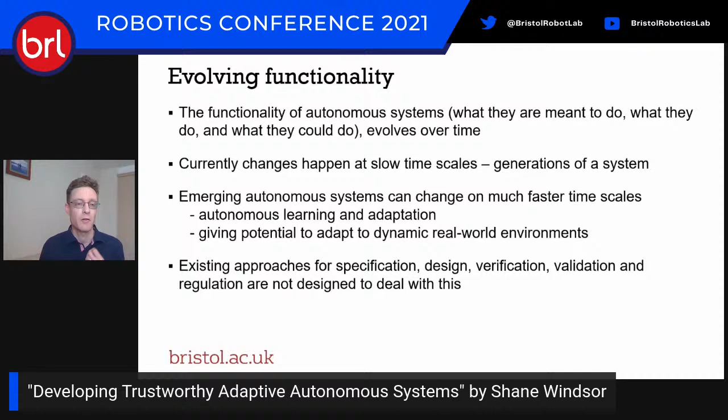Because all of our existing methods generally make the assumption that as soon as the system leaves the manufacturer or the factory and goes out into operation, it's not changing in terms of its fundamental functionality and the way it works. However, if we give the systems the ability to adapt and evolve to make them more suited to complex real-world environments, do we need to change the processes that we're using around these systems in light of this ability to adapt and evolve?

So the objectives for the node are to investigate this question of how, when we give an autonomous system the ability to adapt, what processes we need to use, or how suitable our current processes are for dealing with this.

And the goal is to develop a trustworthiness framework, where we look at the aspects of specification, trust, verification and validation, and regulation together in a holistic way, focusing on adaptive autonomous systems, and create best practice guidance when considering these types of systems.

So how are we going to go about this? Well, the node has 7 work packages, and we're focusing on 3 different types of technology, all of which have fundamentally different ways in which they adapt. We're looking at swarm robotics, soft robotics, and unmanned air vehicles as the technologies where we're developing adaptive abilities.

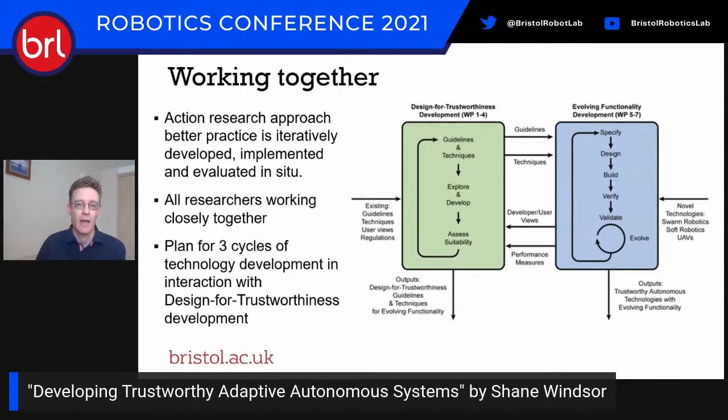So the idea is to have everyone physically based in the Bristol Robotics Lab working closely together on these aspects, and bring in our project partners into this design process and evaluation process as we go through.

So the first adaptive technology we're looking at is swarm robotics, and this is the work of Sabine Hauert.

The particular use case we're looking at is the idea of a pop-up cloakroom. So the idea is there are lots of robots that work independently in a swarm, which can be put into an unstructured environment and operate a cloakroom. You come up to one of these robots at a particular location, give it your jacket, and then it will go away and deposit it and store it.

And the idea with the swarms is that you can do this without needing dedicated infrastructure. It can be low cost, it can be flexible.

What we're really interested in looking at in this design, in this particular use case, is how to design this system in such a way that we consider the aspects of its performance as well as its trustworthiness, its ability to be verified, its ability to be regulated right from the beginning.

And in particular, looking at how, if we change the number of robots or the complexity of the individual robots, this influences this ability. And I should say, for these robots, the adaptive aspect actually comes through the emergent behavior and the interaction of the individual robots in the swarm. So we don't necessarily need the individual robot to adapt, but because of the interaction between an individual robot with its environment and with the other robots, you get adaptive behaviors occurring.

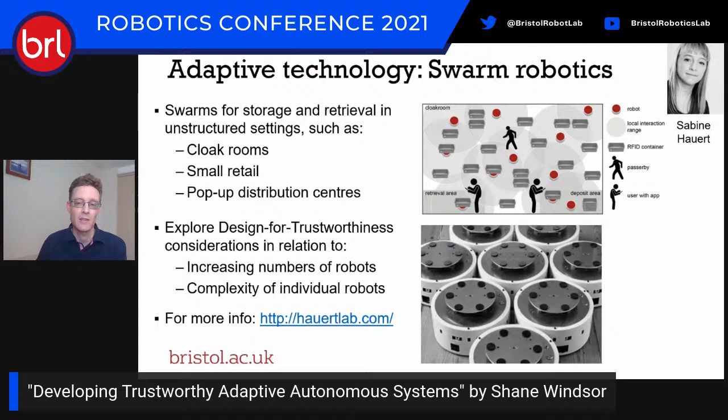Second adaptive technology we're looking at is soft robotics. And this is the work of Jonathan Rossiter. Now, for those who aren't familiar, soft robotics is the idea that you can make robots out of soft, compliant materials, not just rigid plastics and metals, but actually you can use smart materials with embedded actuators and sensors and power sources in clever, novel ways.

And the adaptation in this type of system can come through the material properties of the materials that you actually use to build the robot. So this is a fundamentally different way of adapting, and it's based on the structure and materials used in the robot and the way they're all coupled together.

And in this particular project, we're going to be looking at the development of standards for trustworthy soft robotics. This is a very new and low TRL level exercise on the whole with most soft robots. So there's a real need for thinking about the next step as these advance in technology readiness level for what sort of standards might need to be applicable to these. What might they look like? How would you go about designing it when you've got such varied types of mechanics and materials involved?

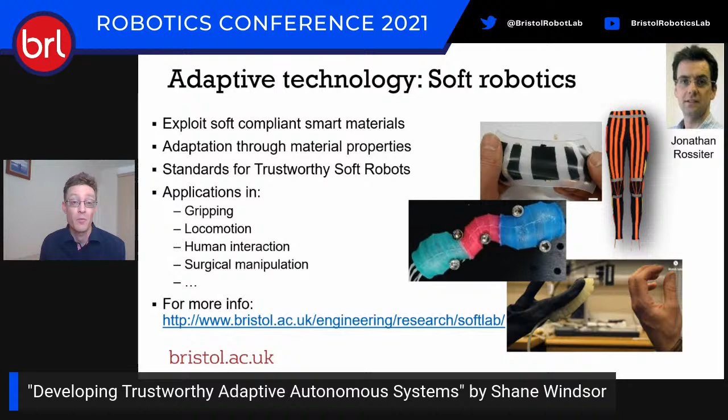And so Jonathan's design will be leading the development of a number of different soft robotics for applications such as gripping, locomotion, surgical manipulation. And if you'd like to find out more, there's lots of information there on his website.

The third adaptive technology we're looking at is unmanned air vehicles. And here the adaptation is actually happening through machine learning algorithms, which are being embedded or being made part of the flight control system for the unmanned air vehicles.

And this is part of the work package that I'll be leading. So here we're looking at the application of machine learning for flight control. And the particular case studies we're looking at is the use of multi-rotors in urban environments, and we're going to be testing this out with scaled down quadcopters flying around in the Bristol Robotics flight arena, and also looking at morphing wing unmanned air vehicles, which we're developing which have distributed sensors in the wings of the vehicles.

And this is inspired by what we see in birds and insects, where they have lots of sensors distributed all across their wing, which pick up on airflow information and forces acting on the wing. And here we're looking at how we might incorporate different machine learning aspects into the flight control system.

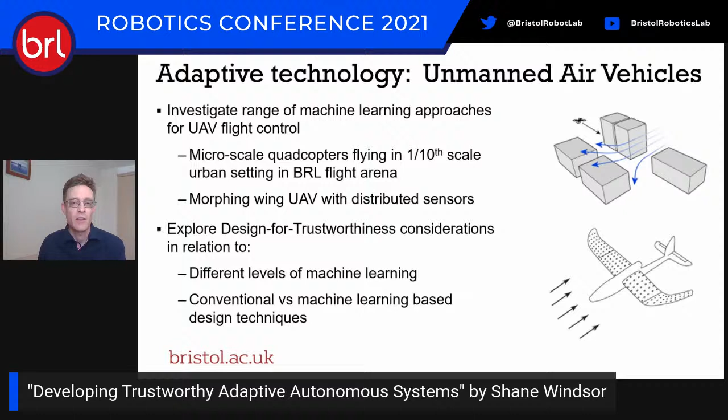From hybrid systems, where just small components of the flight control are based on machine learning, to fully machine learn-based control systems, where we are developing potentially reinforcement learning-based controllers or end-to-end controllers, where we have the complete spectrum from hybrid systems, which are mostly conventional, all the way through to fully machine learned control systems.

And here we're looking at how, when we start bringing machine learning into these type of systems, how this influences the design process, and then the verification, regulation, and ethical aspects that arise from this.

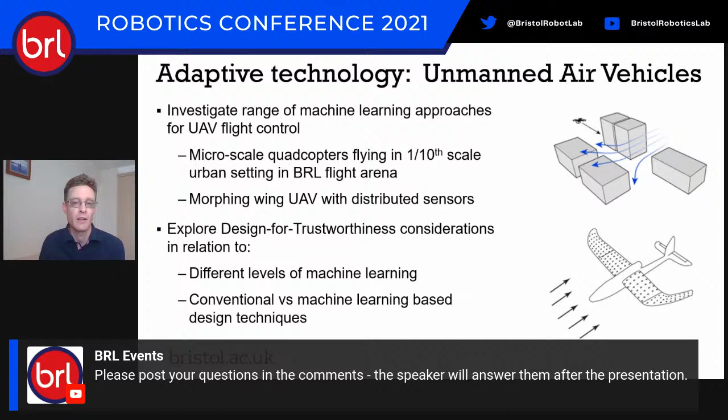So I've talked about the technologies, and the next aspect I want to talk about is that these technologies are being used as use cases and study examples for actually what do we need to do around these type of adaptive systems to make them usable in the real world, in terms of all the other aspects that are needed for a system, such as specification.

So if you've got an adaptive system, how do you specify it? How do you inherently want to give it the scope to move beyond the kind of conditions that it's made for as it's in the factory? But how do you specify the limits on that system? And how do other aspects, such as regulatory considerations, verification considerations, change the way you might specify the system?

Next aspect we're looking at, led by Jonathan Ives, is the idea of trust for an adaptive system. What does it take for a technology to be trustworthy? Why do people trust particular technologies? And what can developers do to facilitate trust, to illustrate trustworthiness?

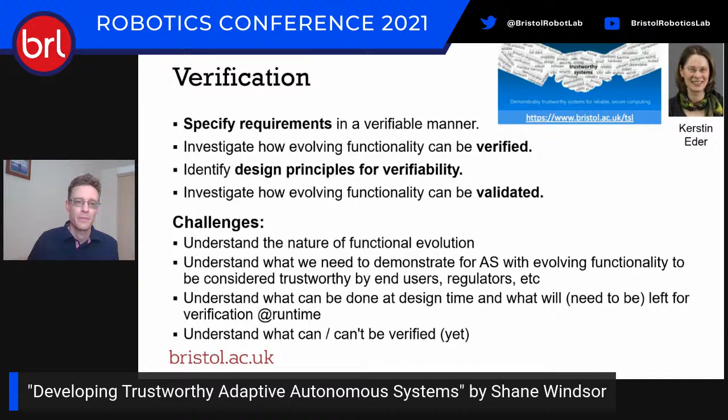As I said, this project is currently underway. We're running for another three years, and we're really interested in talking to people, parties or companies interested in this question of, when you have an autonomous system with adaptive abilities, how does that change how we consider these systems? How does it change the way we trust them, design them, regulate them, and verify them? What is it that we can take from our current ways of doing things and apply to adaptive systems? And what aspects do we need to change in our processes to account for and make them better suited for adaptive systems, allowing us to unlock the potential of adaptive and learning-based systems in the real world?

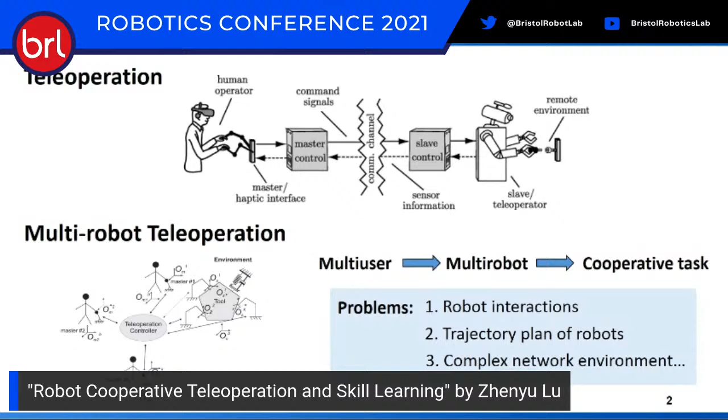Here we mainly consider the case with two robots to complete a human-like cooperative action. Inspired by human beings, the two hands are divided into the dominant hand and the non-dominant hand. The dominant hand is used for positioning and leading actions, and the non-dominant one is to assist the dominant. So we divide the two robots into the dominant robot and the non-dominant robot. The dominant robot is to track human hand motions, and the non-dominant one will react like the non-dominant hand to help the dominant robot.

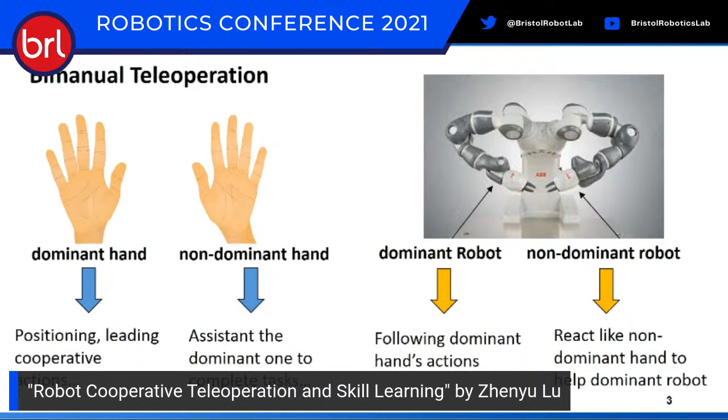A controller for the robot and the manipulator in the master side are designed differently. First, for the dominant robot, we designed a position tracking controller with a robust term.

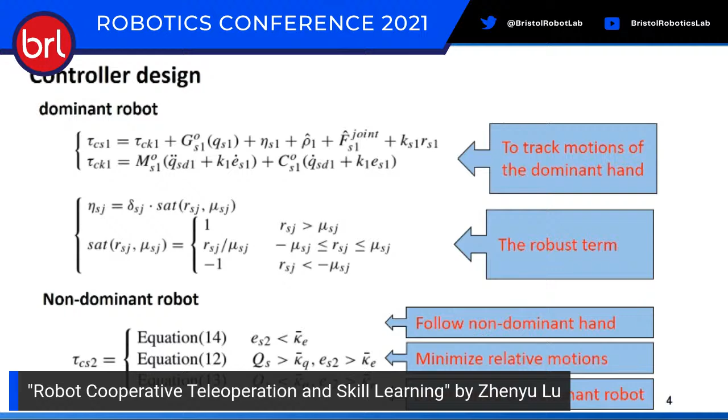For the non-dominant robot, the controller is designed to realize different purposes for different conditions. If the relative distance to the dominant robot is too large, the non-dominant one will first minimize the relative motions and then follow the corresponding leading hand. Here are the exact expressions of the different controllers for switching, for the non-dominant robot.

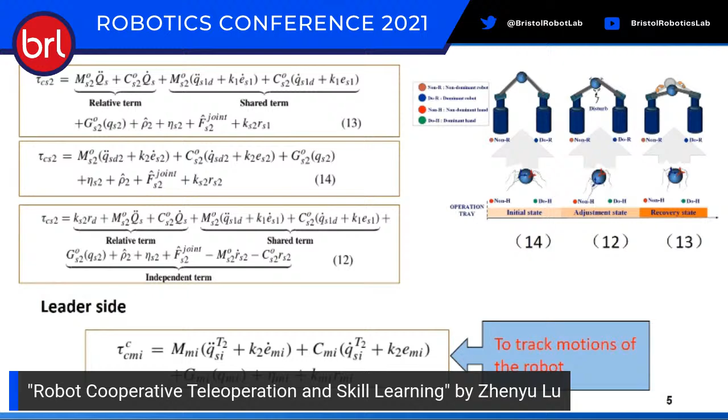And in the leader side, the controller is designed to track the motions of the robot by using PD control. After building the model of the object contact force, we complete the experiment of picking and placing a ball by teleoperation.

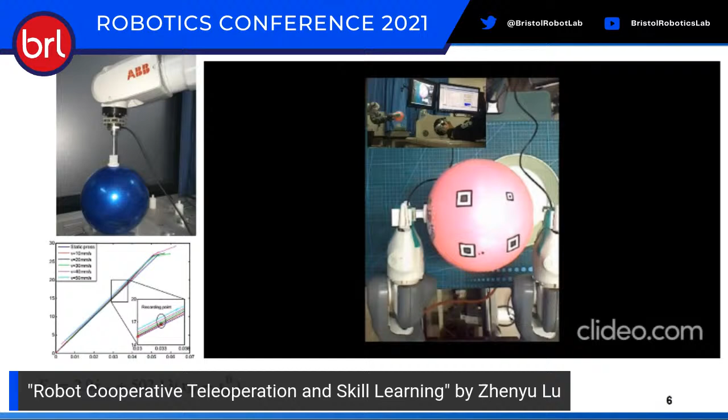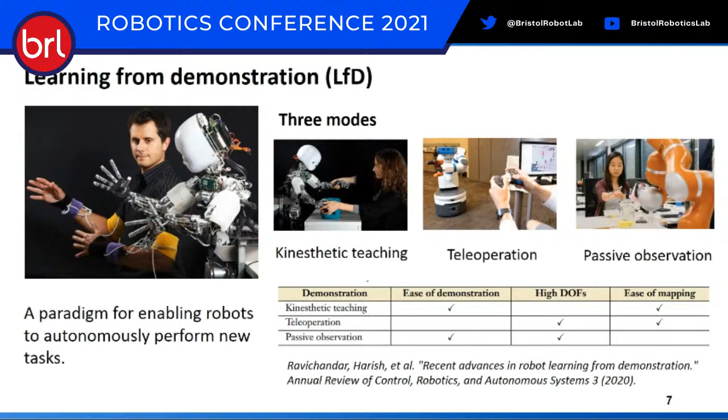Teleoperation is also a way for learning from demonstration technology, which is a paradigm for enabling robots to autonomously perform new tasks. But sometimes the demonstrations face challenges such as occlusion, rapid object movements, and some mirroring sensor noise, which makes the learning results fail.

What we thought is to add some special constraints to the skill learning process. DMP is a common way to do skill learning, and its expression is very simple. It just has one damping and one stiffness factor and a force nonlinear function Fs.

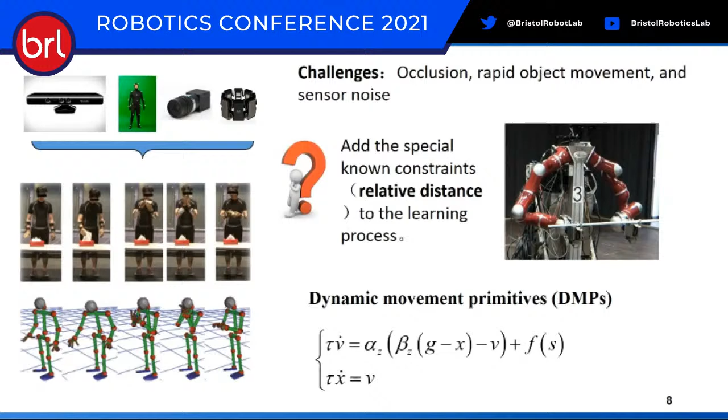After segmenting the demonstrations into primitive skills and making alignments for the segments, the skill will be learned and generalized to new cases by changing the starts, ends, and scaling factors, and applied to the new tasks.

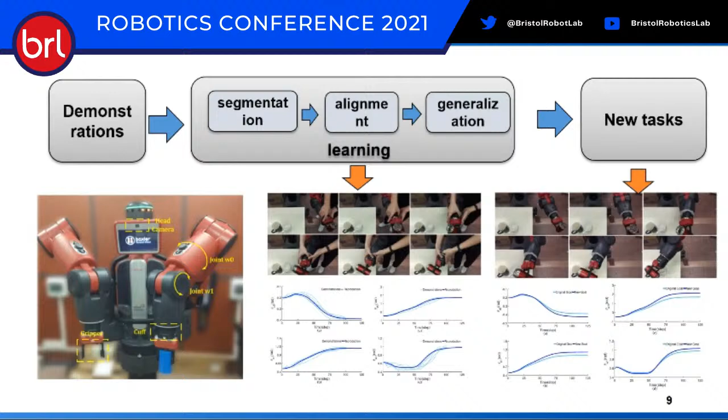What we do is add a new term to the original DMP expressions, and we use the barrier Lyapunov function to generate the additional term to enable the skills to satisfy the constraints.

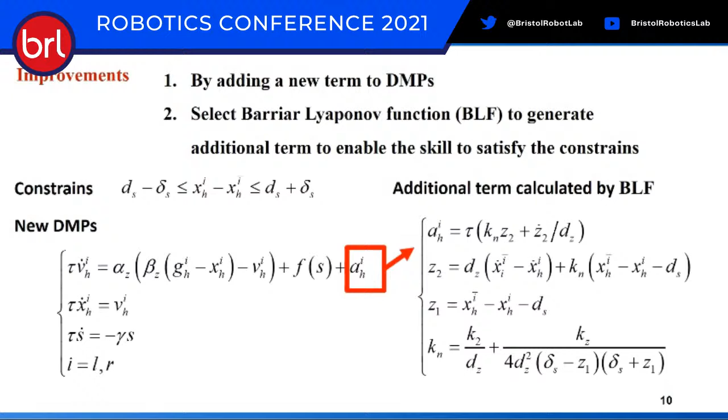For the redundant robotic arm cooperative manipulation, we present the following solution by using the null-space method to optimize the joints.

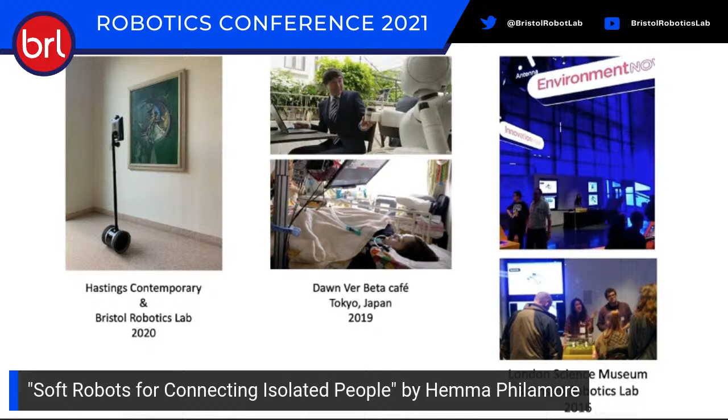Robots are increasingly being used as companions and helpers in care homes for older people. The Dawn Ver Beta Cafe opened in Tokyo, Japan in 2019. The hospitality staff were robots, teleoperated remotely by people with severe physical paralysis, providing access to financial, social, and professional independence for the human operators.

The goal of my current project with Neon Dance is to develop soft robot avatars through which humans can access creative spaces, such as performances and art galleries, in a new and interactive way. Our project aims to empower and connect humans through automation, as opposed to invalidating them.

In order to develop something that is truly user-centered, we are exploring ways to democratize technology by bringing end users from non-robotics backgrounds in as active participants in robot co-development, and designing interfaces to facilitate this within familiar and public spaces.

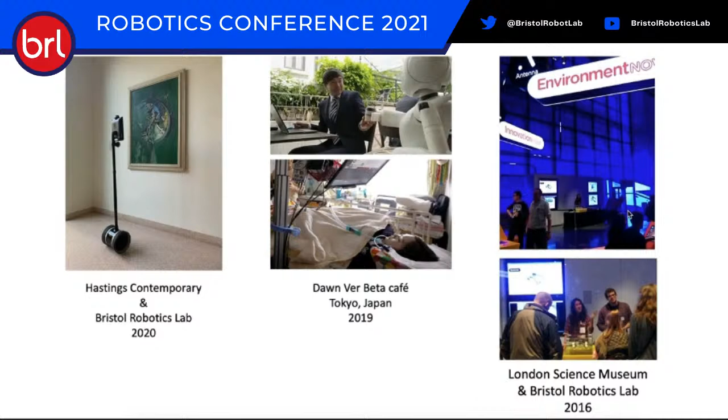The overall goal of this work is to develop a kit of robot avatars which will be used to connect isolated people with cultural spaces. By teleoperating robot avatars from their homes, initially via video call, people experiencing isolation and loneliness will be given the capability to utilize embodied agents as a means to participate in arts and cultural events.

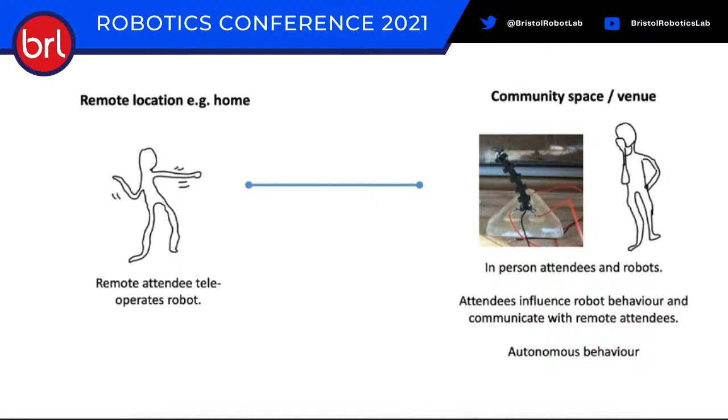To get to this point, we are working with a group of socially isolated older and younger people to co-design miniature soft robots through a series of workshops. The first milestone of this work, scheduled for the end of this year, will be to use the co-developed agents as avatars that will be teleoperated by their co-creators, the workshop participants, in order to access an art installation devised by Neon Dance. This will be presented at several venues throughout the UK and internationally.

Within the installation, a group of miniature robots, some teleoperated, some operating autonomously, will interact with a live in-person audience. The teleoperated robot avatars will facilitate interaction between the audience at home and the in-person audience, the other robots, and other at-home audience members via their robot avatars.

Our intention is to provide not a filtered version of being there in person, but instead a different version of the same reality, a remote augmentation of the operator's body that feels meaningful and connected.

My collaborator, Adrienne Hart, will now explain more about the vision for how the robots will be used from the perspective of our partner artists and venues.

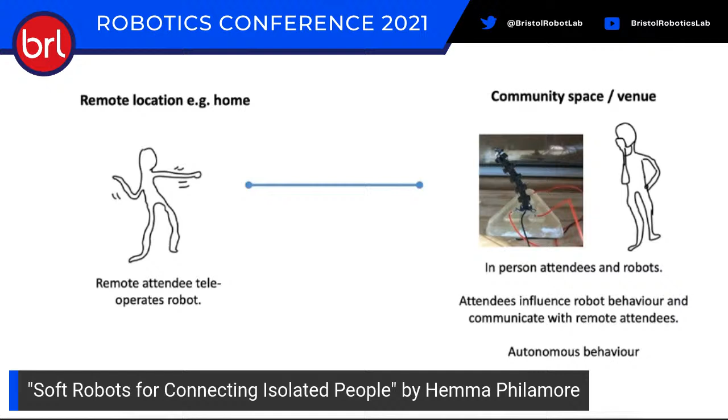Hi everyone, my name is Adrienne Hart and I'm the Artistic Director of Neon Dance. For the past 16 years, I've been creating dance works that explore technology and design with the body as a central tenet. Collaboration is at the heart of my practice, and I bring together artists, musicians, technologists, scientists and academics to create collectively what we could not create alone.

In 2020, I started working with the roboticist Hemma Philamore at University of Bristol's Robotics Lab and artist Akabik to explore social connectivity and collaboration using bio-inspired robotics. The work is designed to unravel the origins of loneliness and explores the idea that loneliness stems from the interaction of the individual with the social realm, so that it's not just mental, but also physical, sensorial, and material.

Titled Prehension Blooms, our aim is to create a totally unique interactive performance experience with audiences free to roam, encountering 3 highly skilled dancers and a beguiling, playful robot community. By moving, sitting, lying down, and congregating, the audience will influence all aspects of the performance, creating a genuinely interactive experience. There will also be up to 6 teleoperated robots, which enable remote audiences to traverse the environment, interacting with physical audiences, fellow robots, and performers.

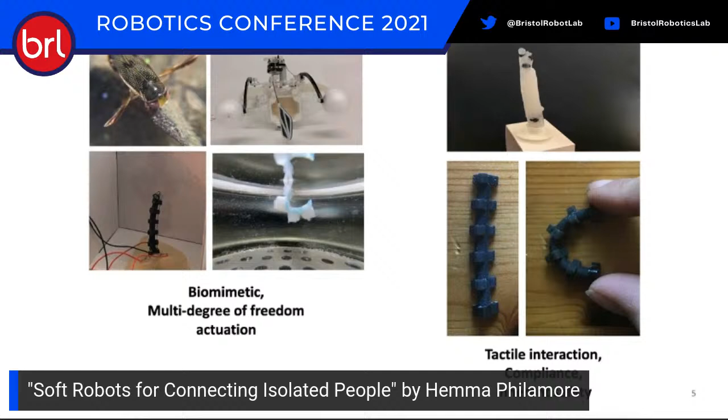We found it a challenge to predict what type of robot morphology or movement audience members would want to use to access a creative space or performance remotely. So we produced a set of building block devices to enable us to workshop different ideas with members of the public. We generated a set of bending tentacle-like components made from 3D printed TPU rubber.

These were actuated using a simple setup of either 1 or 2 antagonist pairs of artificial muscles. Like in the musculoskeletal systems within our bodies, when an agonist artificial muscle contracts, it causes the robot tentacle to bend. When an antagonist muscle, the opposite muscle in the pair, contracts, the robot bends the opposite way, and the agonist muscle is extended to its original length.

The artificial muscle actuators are shape memory alloy, or SMA, wires, which are made from a nickel-titanium alloy known as nitinol. They can be made to contract by heating and lend themselves well to miniaturized and mobile systems due to a minimal requirement for driving electronics and other hardware.

The actuators in the robots are configured as a coiled helix and are arranged in sets of either 1 or 2 antagonist pairs, creating different motion depending on the muscle arrangement.

The robot controller used input from a camera and a simple position or motion tracking algorithm to find the position of an object or position of the point of motion with the greatest velocity in the field of view. The robot tentacle followed the position, allowing it to be controlled by a person moving in front of the camera.

In some cases, this control was open loop. In others, an additional camera looking at the robot provided feedback of the robot's position, which was used for closed loop control.

A wearable breathing sensor developed by Alice Haynes, a PhD student at Bristol Robotics Lab, was also used to control the robots, with the robot moving from side to side in time with a person's breathing.

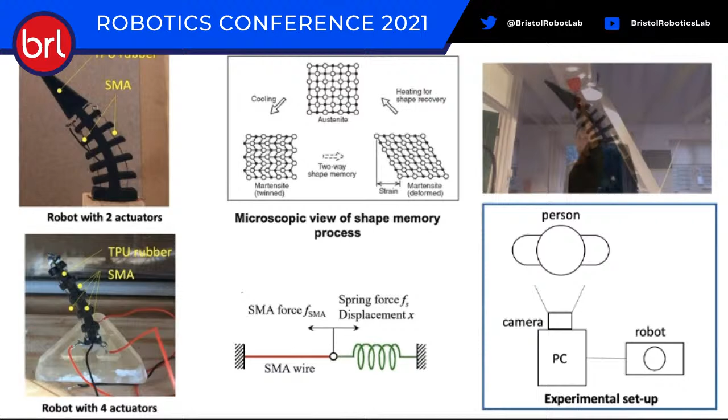I'll now talk about the first stage co-creation workshops, which took place this month. Members of the public in St Ives and London participated in the design of the robots by controlling simple building block soft robots using the movement of their bodies or everyday objects in the room, and generated ideas for how this could be used to communicate with another human or participate in an activity remotely.

The workshop was centered around three main questions. What mode of control makes me feel most connected to this robot? How would I use this robot to interact or connect with another human being? What type of motion and what shape of body would I use to do that, and why?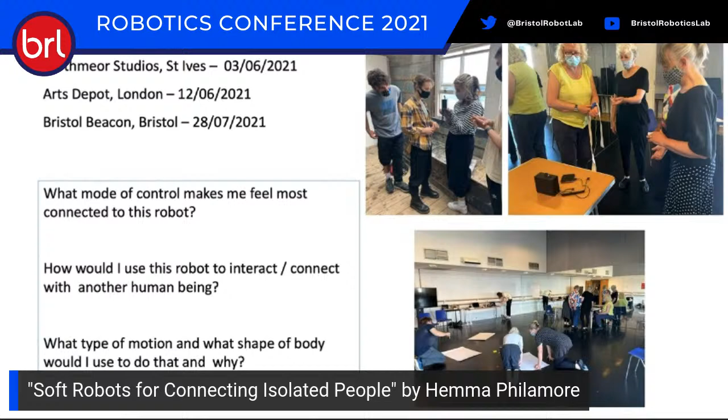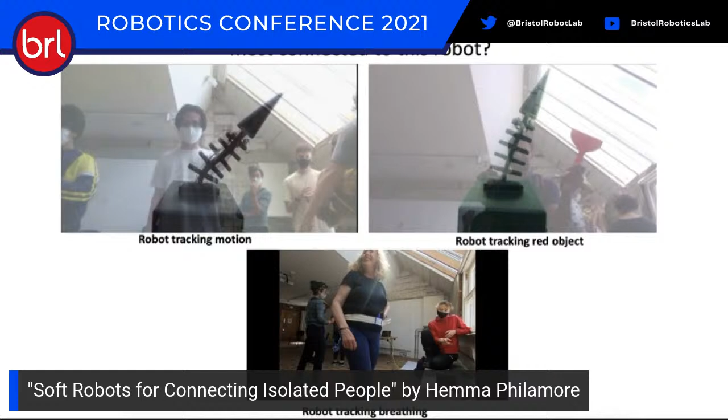We asked participants to compare three ways of controlling the robot: using motion tracking of their bodies, using position tracking of an everyday object, using a breathing sensor to track inhalation and exhalation.

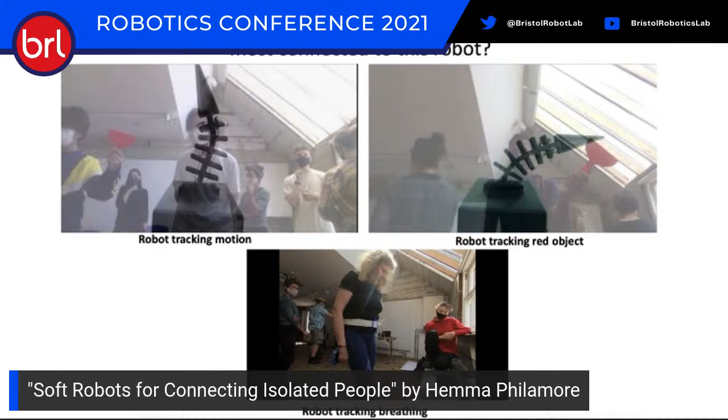Our goal was to find out what kind of motion participants made when told to control the robot using their bodies, with minimal further instruction. We also wanted to investigate the importance of a physical interface to use as a controller, and whether a passive object could fulfill the role of a joystick or other active controller.

The activity allowed us to observe the accessibility of these different types of control and how intuitive they were to use.

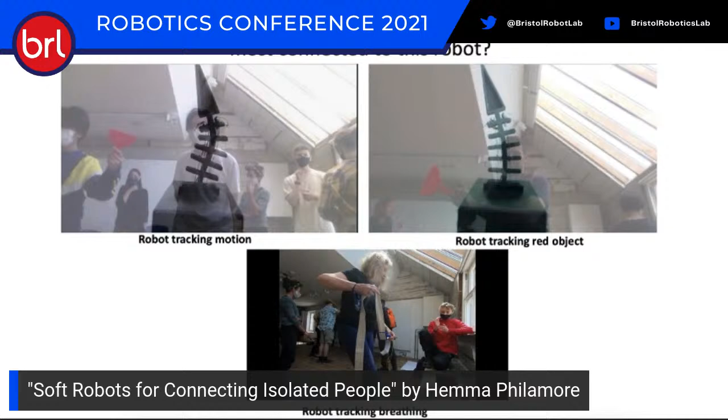Participants also experienced controlling actuators with different morphologies and different types of motion. The robot on the left has a more limited range of motion. It simply moves from side to side.

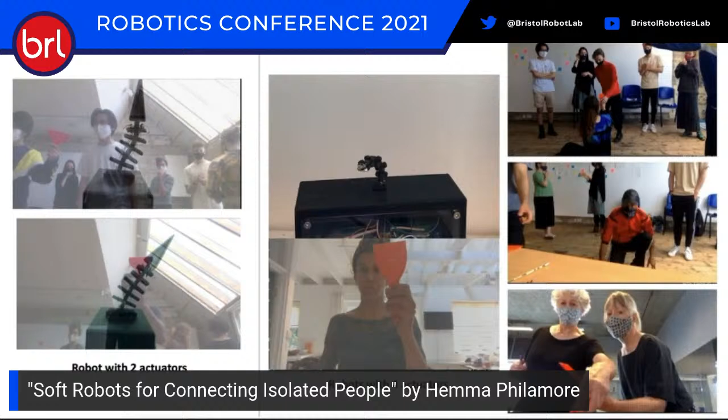Participants quickly learned how to control the robot, interacted with it for a comparatively short period of time, and used simple movements. The robot on the right moves with a greater degrees of freedom.

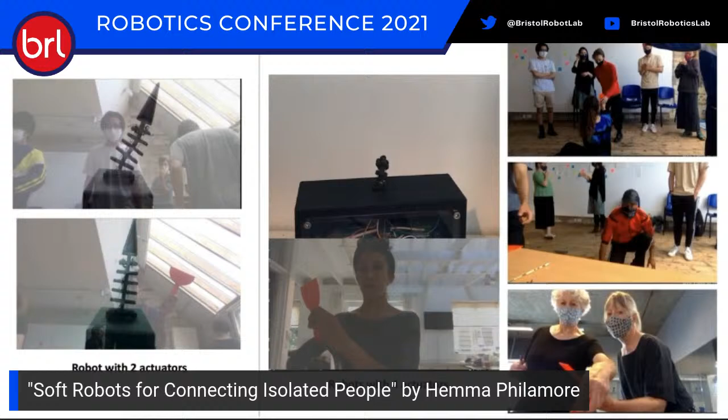Its motion is slower as a result of the open loop controller used for simplicity in this first iteration. In spite of this, participants engaged with this robot for longer by comparison, and used far more imaginative movements to control its behavior, and even started to work together.

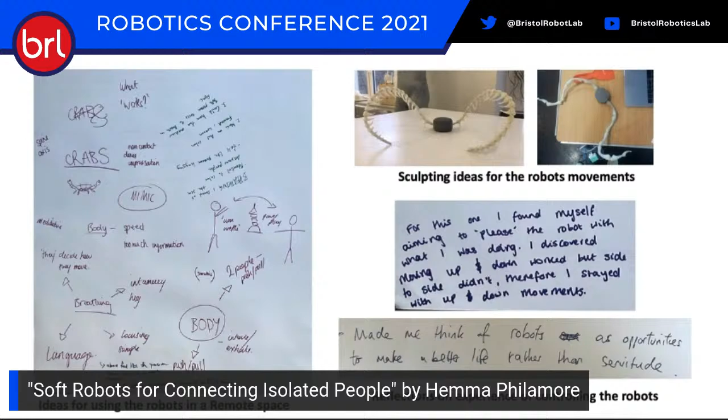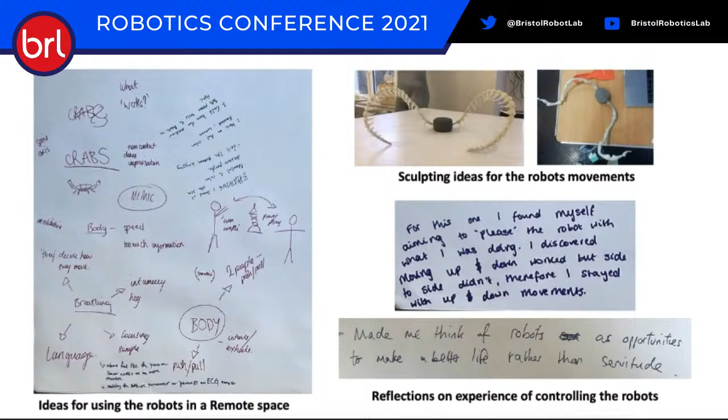We asked the participants to reflect on the experience of controlling the robots in these different ways. We also asked Elaine Check at the School of Education and School of Computer Science at University of Bristol to extract qualitative data from the activity, looking at which activities were useful for communication and promoted interaction between the participants.

The outcomes of the initial stage workshops are currently being analysed to yield results that will be taken forward to the next round of co-creation sessions with members of the public. In particular, we are looking to address three main topics.

We are comparing the positional accuracy achieved using the different interfaces for controlling the robots to see if any significant differences in effectiveness can be observed. As part of this, we want to see if everyday objects can act as an accessible, easy-to-understand interface for elderly people, for example, to understand how to control the robots.

As participants reported a sense of learning to operate the robot over time, we are also comparing the quantitatively measured accuracy and responsiveness with the perceived accuracy and responsiveness for the different modes of control. In other words, how accurately the robot followed the movements people made compared to how it felt. A key challenge in teleoperated systems is the lag that can be experienced by end users, and so utilising this perceived accuracy may improve the user experience in the presence of latency.

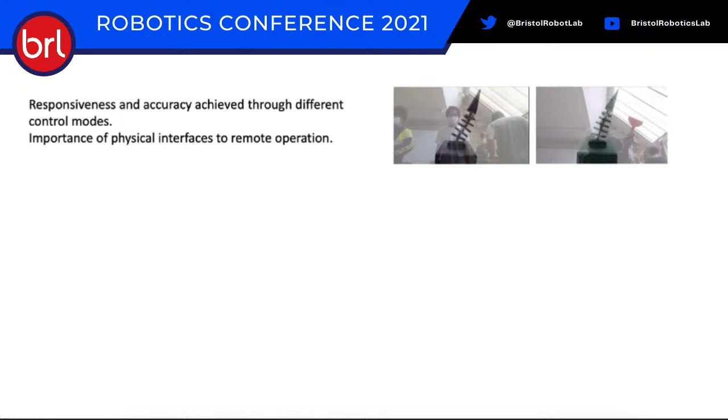We are also using the image database collected to develop the robot controller and create a state action mapping that is entrained through interaction between user and robot. The goal is to improve the adaptability of the soft under-actuated robots to different movements and users.

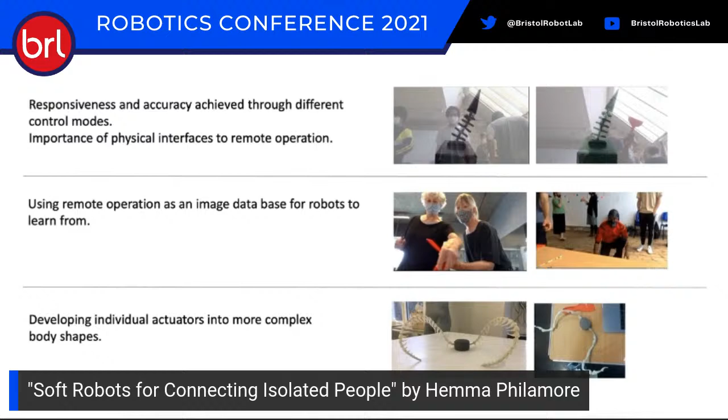Lastly, the set of building block actuators is being developed further to allow individual actuators to be connected together by participants to form more complex body shapes. This will allow participants to co-author the robot's overall body shape and movement in the next set of workshops, which will take place at Bristol Beacon later this summer. This modularity is one reason for choosing shape memory alloys to drive the robot actuators, as their driving electronics can be readily miniaturized.

I'd like to thank all members of the team involved in this work and all of our funders. Thank you for listening, and do feel welcome to get in touch with any questions about this research project.

Many thanks to Hemma for this presentation. I will put her email in the chat now, so you can have it and hopefully contact her if you have any questions at all. So we're a couple of minutes early now. The next talk is actually my talk. I will hand over to George now, who will be moderating the rest of the afternoon session. George, I believe we have a couple of minutes. We're a bit early, so maybe we should wait a little bit.

Yeah, sure. So I guess we'll take a break here and come back just before 3 o'clock, so I can introduce you and then you can start and get going. Or reintroduce yourself, I guess. Okay, we'll see everyone in a couple of minutes.

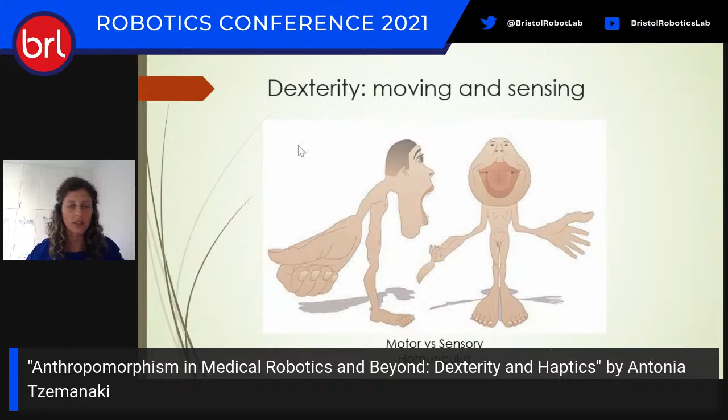So you can see, for example, in the motor one, our mouth and our hands are the biggest part, and our head as well. And the sensory, of course, we have the hands yet again, the tongue, the lips. What I like to keep from this is that for both the motor functions, which is what we use to take action, and the sensory functions, which is what we use to understand and interact with our environment, the hand is the common part here.

And of course, if you look at the history, we have found connections between our hands and the fin rays of fish, which gives us some look into perhaps the fact that we were not always land creatures, but we have some sort of aquatic past. And even a bit more recently than when we were perhaps having connection to being fishes, we were using our hands to build and to use tools to fight each other.

So obviously, I'm not going to be staying so much on the fighting. I'm going to be staying more on the use of our hands, since when we are kids, this is the first thing we usually use to interact with the environment. We use them every day to cook, to play, to touch each other and feel close to people, especially during lockdown. I think that probably will mean a lot to a lot of us.

And on the bottom left, you see one of the applications of my work, which is surgery. I'd like to start from this. So when I'm talking about anthropomorphism in surgery, I don't mean two human-like robots talking to each other or actually doing a surgery on their own automatically. We are not there yet. We are not at that point. And I don't even know if we would want to go there exactly.

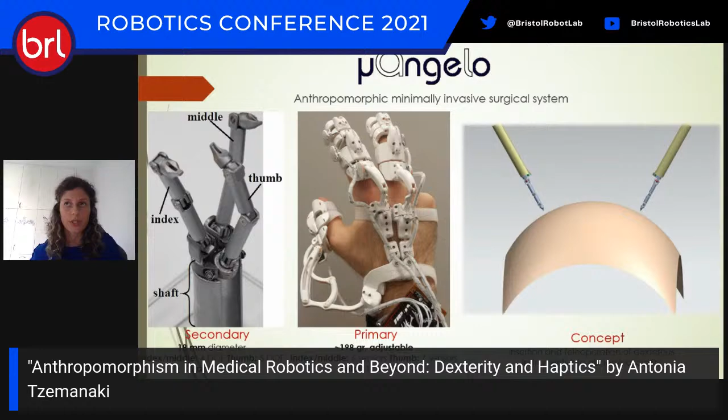And of course, we have been using magnetic sensors, and inertial measurement units as well, to try to make it as compact and as comfortable as possible. Something we are continuing to work on now, not necessarily related to surgery, but we're applying it in stroke rehabilitation. We're also applying it in nuclear robotics and industry, by looking at work in glove boxes and glove box operators.

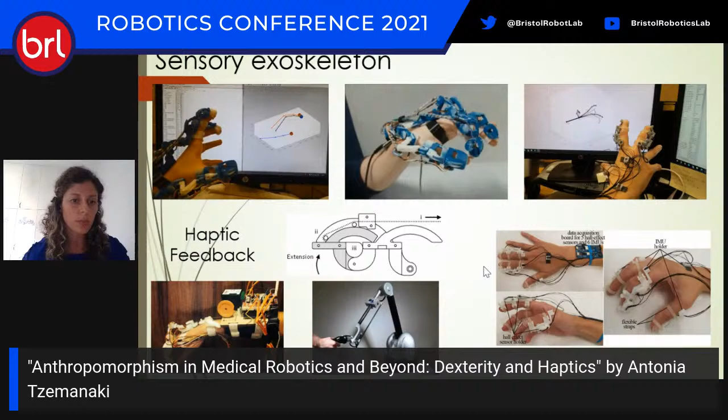At the bottom left here, you can see some of the work we'll be doing in haptic feedback. So these exoskeletons are mainly sensory, so they can track what your fingers and hands are doing, but they can also, through a cable-driven mechanism, give feedback back to you. So let's say you're grasping something in a teleoperated way, you're squeezing it too much, therefore the exoskeleton will take action and give you some resistance to feel that you shouldn't be putting so much force there.

So moving a little bit more into the haptics here, you see a little device which we call a fingertip haptic device, which we created with one of my students a few years ago. We were interested in applying some sort of force feedback or small forces, almost tactile feedback, on the fingertip of a surgeon or a doctor who was trying to diagnose something in a teleoperated way.

So we created this device that you can see in the video, which basically has a little inflatable soft pillow made out of silicone, which can inflate and deflate, therefore changing the stiffness, and also being able to move up and down with a linear actuator and squeezing your fingertip.

So using these two features, we were able to create an array of different sensations, and then we were applying that using a virtual environment experiment where the users, who were either doctors, clinicians, or non-clinicians, tried to distinguish between areas of stiffness. We had smaller, softer, and more rigid ones.

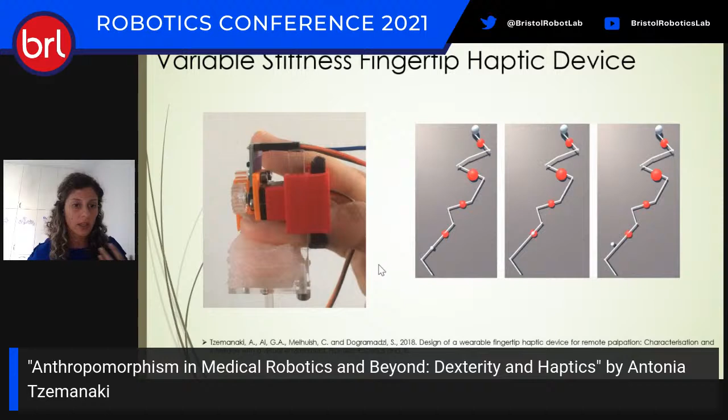So if we can apply this further into other applications of surgery, detecting any cancerous lumps, but of course also manipulation of objects, this can have really crucial and big impact on in-hand manipulation and improving this dexterity.

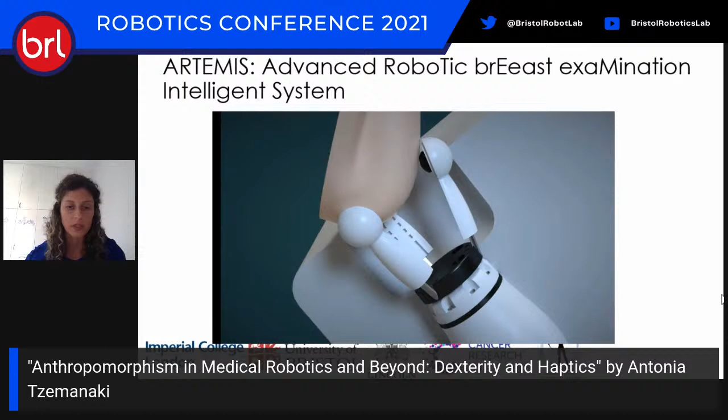And the other part you might see here is a little black hemisphere. This is also made out of silicone, and it is actually a smart sensor. I'll show you more about this in the next slide. This is actually work that we've been doing with a couple of students, one of which is George, who is chairing the session.

So the important part about this is that young women do not actually get the screening that they need, especially in the UK. NHS is sending screening opportunities to women usually above 50 years old. Therefore, by having an automated system like this, we're hoping to increase accessibility.

So in this slide here, you can see one of the smart and soft sensors that we are exploring. This is the work that they've been doing with George Jenkinson and, of course, Andrew Conn. You can see here that there's soft silicone again, which has tubes attached to it and basically works in a pneumatic way. And you can see at the top right, as it is basically exploring a fake soft silicone that is there to emulate skin.

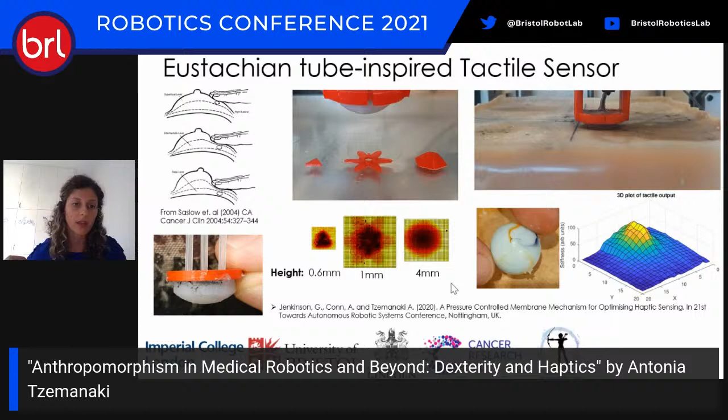In the middle here, you can see what I think is really interesting, that even with this little sensor, which is a fingertip in diameter, you can detect features that are as small as 0.6 millimeter thickness. And I think this is really pushing the state of the art, especially since what we're really aiming for here is not just surface sensing, but looking more in depth and trying to detect lumps or abnormalities in a 3D volume. And we're doing that by changing the stiffness, inflating or deflating the sensor to increase the range.

And this one is a similar concept sensor, but this time it includes different technologies. It has a camera inside, which is basically looking at the deformation of these pins that are on the inside of this membrane. And at the same time, we are again employing pneumatic actuation here. As this is running, you can see how the internal pressure is changing, and how we can then track the position and orientation of the pins inside the membrane.

So this is work that is actually being published tomorrow. It's very fresh, and I hope that we will share more of this as time comes.

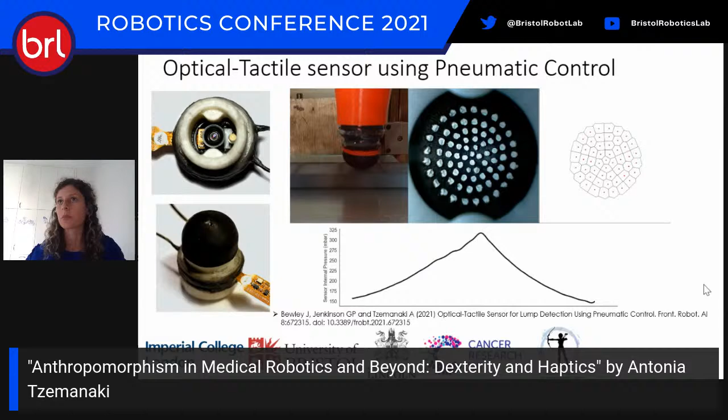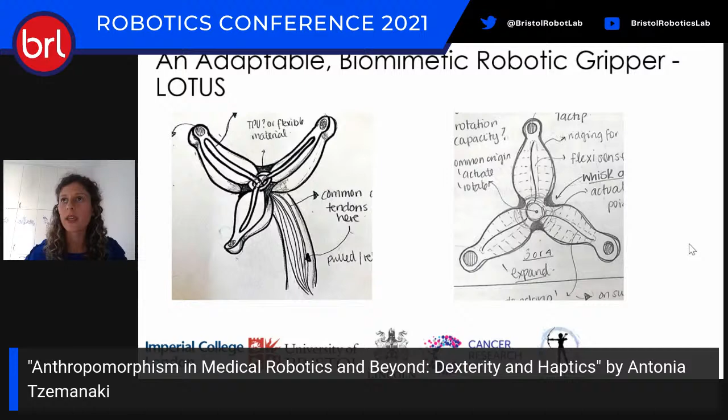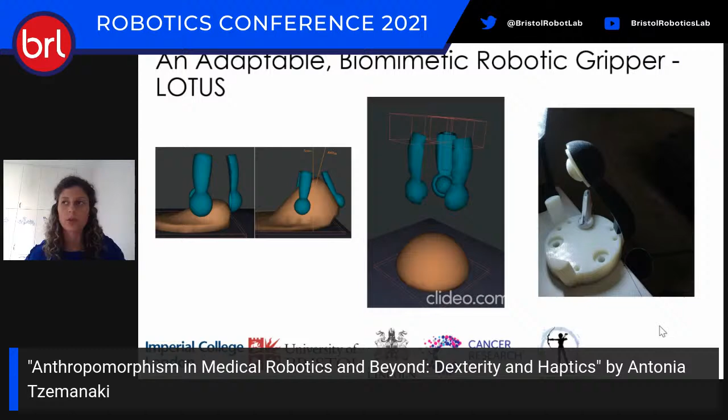So I mentioned before the lotus flower I showed you in the concept video of Artemis. This is bio-inspired, and it has come a long way from a simulation in a software framework that you can see here on the left. Now on the right, we have actually manufactured it, and we are actuating it with a cable-driven mechanism. You can see here it has a dummy sensor. This white rigid part is basically where the soft sensor that I showed before will go, and the rest of the device is again soft and rubbery and safe to touch.

Moving on to one of my other projects with my other researchers, we have been looking at how we can use our expertise on hand tracking, on assisted living, as well as rehabilitation. So especially for stroke rehabilitation here, we have been looking at creating exoskeletons that are soft again, working either pneumatically or again in a cable-driven way.

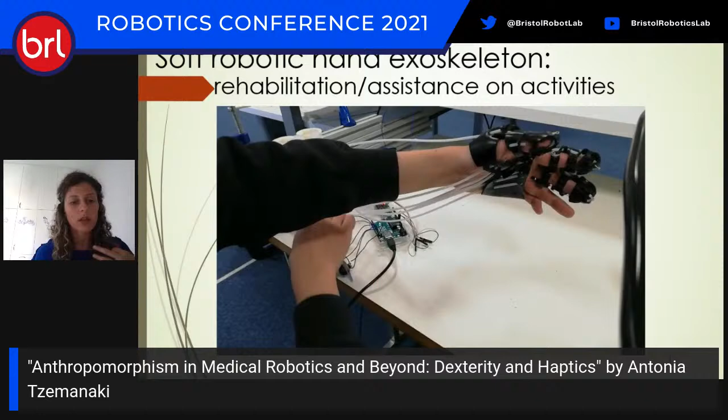Here you can see the work of one of my students, where he was able to passively move the fingers of a hand by using the system here. At the back, you can see an array of motors and a cable-driven mechanism. The point of this is to be able to extend the range of motion when you, as a stroke patient, cannot actually move your own hand, but also to help with activities of daily life, such as grasping a bottle, moving a cup of tea, and so on.

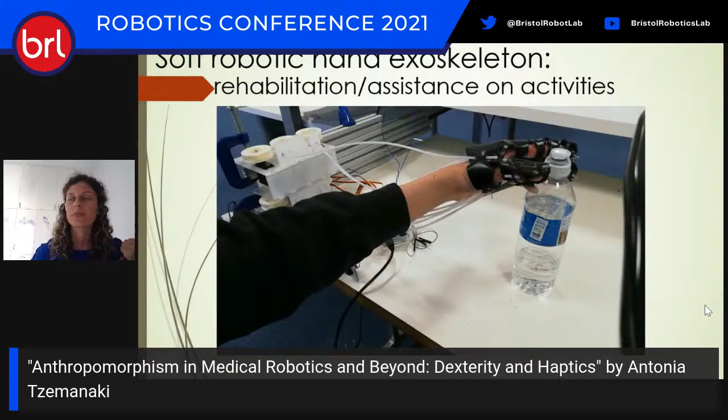So I'm going to jump to one of the last slides now. This is one of my projects that I'm very, very passionate about. It's about sign language learning and how we can use robotics to facilitate that, to make it more interesting, more engaging, and to make it something that people want to do.

And this is not about creating yet another glove that reads sign language, but it is more about interacting with people who do not usually use sign language, who perhaps are hearing people and therefore do not feel that they have the need to do so.

But it's very interesting in the deaf community. If you look at the French deafhood principles, there is a suggestion that if we cannot sign, we are unable to use all our senses. Therefore, we are sign impaired. And I find this really, really interesting as a concept. Of course, I'm always very interested in hands and how we can use them to extend our senses and interact with our environment. I think another point is that often there are things we cannot actually communicate using just speech, but sign language can actually be more powerful at these points.

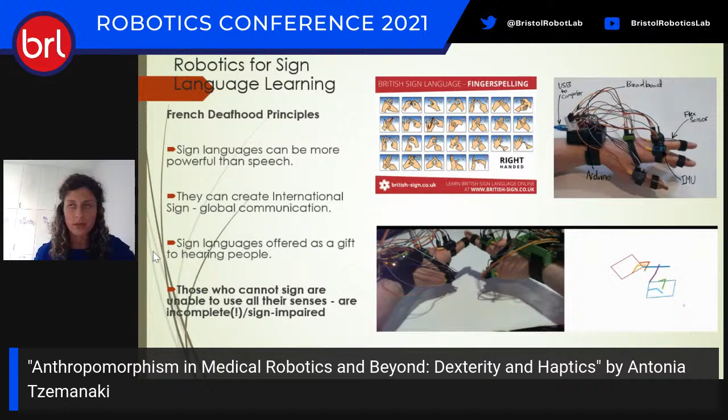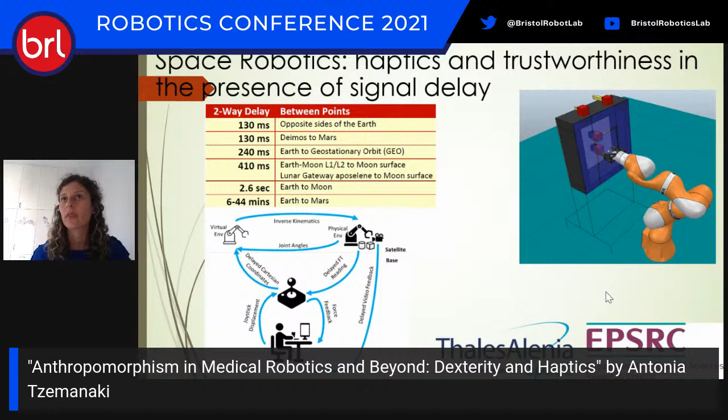So there's quite a lot of projects going on. You just presented there, so it's clear what the academic route of everything is. I was wondering, in what ways do you see this as one of the purposes of this conference - in what ways do you see that you might be able to potentially collaborate with people in industry, or in what ways are you already?

Oh yeah, thanks. I hear my voice now. Oh, sorry. Yeah, that's a great question, actually. Thanks for it - it's a good opportunity to elaborate on that.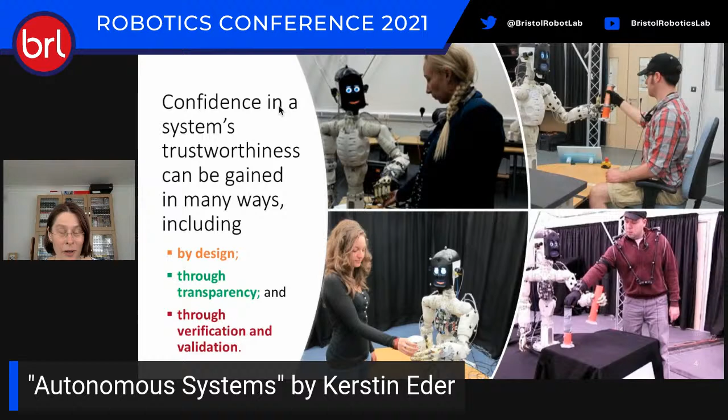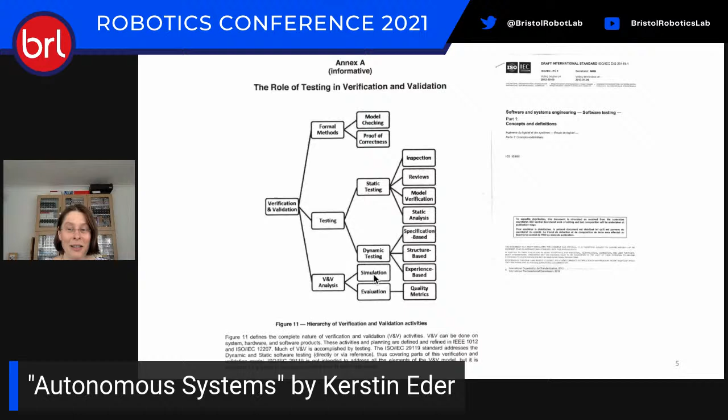Now my experience is when I talk to someone from the software community, when I say verification, what they hear is formal verification. Just to point to the standards, verification and validation techniques do include formal methods as well as test and simulation-based techniques. So verification and validation does not exclusively mean formal methods. It's clear that testing and simulation are also under that heading. So when I say verification, I mean the process used to gain confidence, and we use any technique that helps us gain confidence.

So let's start. I said that confidence in a system's trustworthiness can be gained in many different ways, including by design. That means systems that are simple by design can typically be understood, and if we understand something, we might trust it. Therefore, simplicity and clarity of both the design and implementation are two of our key research objectives.

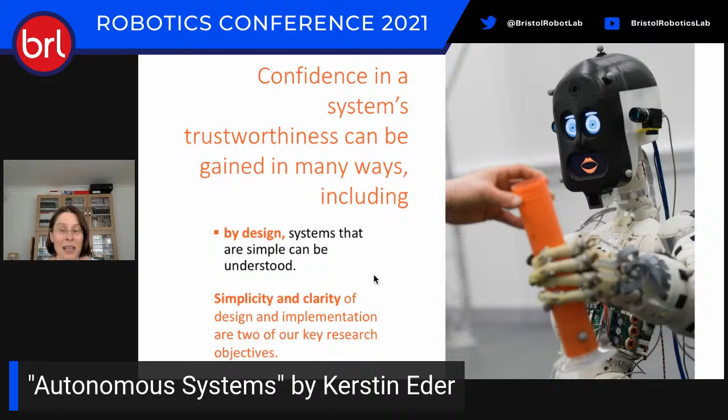We have recently started a new research project that asks the question: what makes a system trustworthy? From the perspective of the end user, but also considering regulatory requirements and ethical aspects. Now it's all too easy to make things work without considering how one can demonstrate that it will always work safely, securely, and is reliable.

Now this requires a change of mind and a change of design process. In fact, engineering has matured so much now that we are capable of building a variety of complex autonomous systems and robots. And I claim the intellectual challenge now is to build them in such a way that their trustworthiness, or correctness with respect to the specification, can be demonstrated. So promoting trustworthiness to a first-class system design objective is an area that we are focusing on in the Trustworthy Systems Lab.

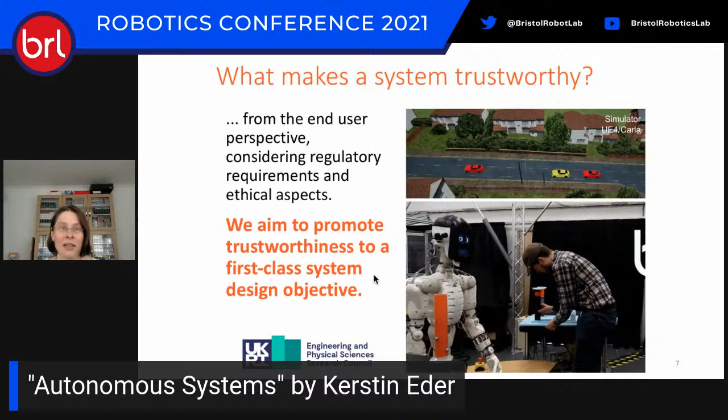Now, the second way of gaining confidence in the trustworthiness of a system that I mentioned was through transparency. So systems that allow us insight into how they make decisions, why they act in a certain way, and potentially also how they use resources such as power, energy, and time. Again, these systems may become understandable, and through that understanding, we might trust them. So transparency is another one of our key research objectives.

Now, there is a lot of research on transparency in terms of the decision-making of autonomous systems, but I'd like to illustrate the principle of transparency in a slightly different way today. I would like to focus on what I'm calling energy transparency, and I mean by this the energy consumed by a computation. Now, I'm interested in this area because from a verification perspective, I typically focus on safety and functionality, but from an end-user perspective, if a system runs out of battery prematurely, I consider it as faulty as if it had a design flaw.

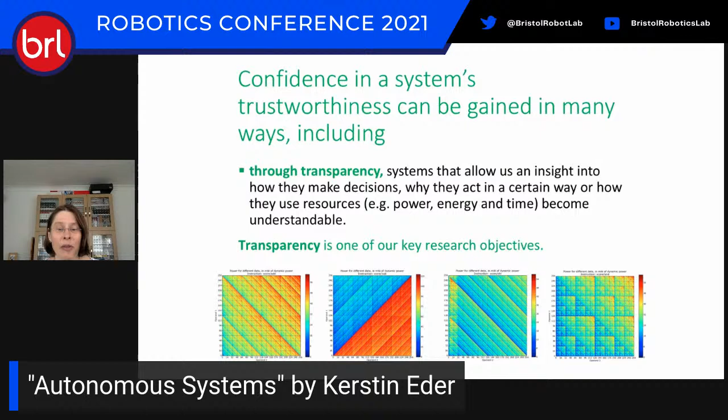Which is what brought me to the area of energy transparency, or at least energy modeling, and that then leads to the concept of energy transparency. Now let me explain. What we see here at the bottom are 4 heat maps. They show the energy consumed by instructions as data is processed in a CPU. From left to right, we see addition, subtraction, shift left, and a logic AND operation. Now, while the logic AND might perhaps be the most beautiful, and indeed we won an art competition with this heat map, the subtraction heat map, which is the second from the left, the half blue and half red, is perhaps the most interesting if we want to better understand how energy can be saved during a computation. So let's focus on that.

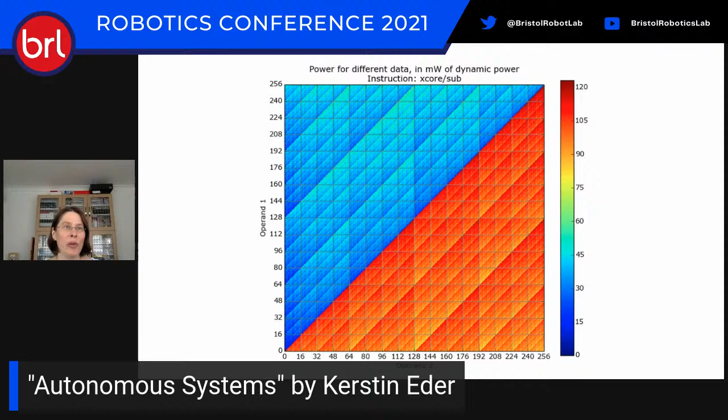So what we see here is this subtraction operation applied to 8-bit data. On the y-axis, we've got operand 1, from which we subtract operand 2. So let's pick a value, 160. And you can see as long as we're taking values which are less than 160, we end up using little energy. As soon as we get to the diagonal and we get a negative result, we get much higher energy.

Now, for the computer scientists amongst us, this is the consequence of using 2's complement representation inside the computer, and that gives us a leading set of 1s. So when we switch from positive numbers to negative numbers, there's a lot of bit switching, and bit switching costs energy. Now, this is very, very fine grain, right?

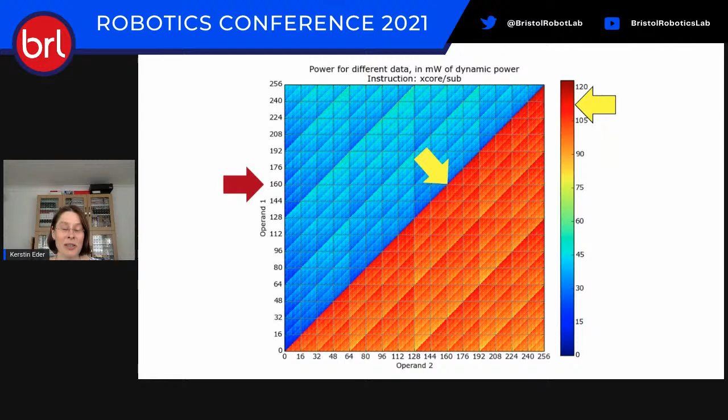But in principle, in our research, we capture energy consumption of computation in energy models. And that gets me back into the autonomous systems area, because such models can be used in order to analyze and predict the energy consumed during a computation, ideally at compile time or alternatively at runtime, without the need to measure explicitly. And in the European-funded project TeamPlay, we did exactly this. We were modeling energy consumption, but also time, as well as security. And we then enabled the non-functional properties to be analyzed effectively and treated as first-class citizens during system development and at runtime.

We started off with software contracts, and these software contracts then flow into the source code. We then have our energy models, which support the compilation and sophisticated analysis for optimization. And then we applied this to a number of use cases, most of which you will find at the BRL. These include drones, smart Internet of Things devices such as parking lot meters, a camera pill, which is a really interesting application because you really want to make sure it's as small as it needs to be in order to take pictures inside you, and it uses the energy that it needs economically. And then also a number of space applications.

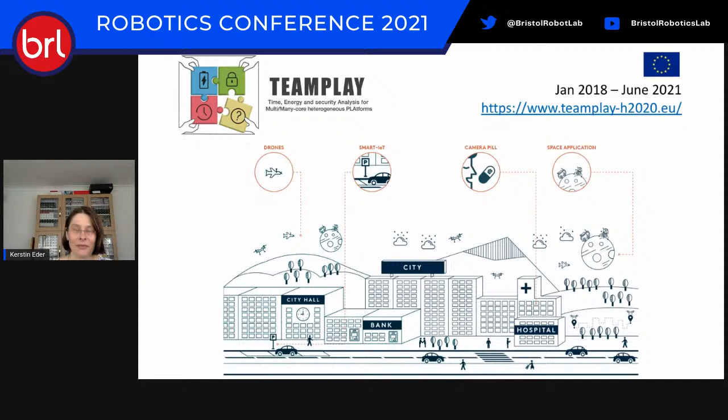Now, what you can do is capture the inherent control law in a set of assertions. So we're going back to the requirement of stability of the system, using control theory based on Lyapunov, which gives rise to a set of assertions that capture stability requirements of this system.